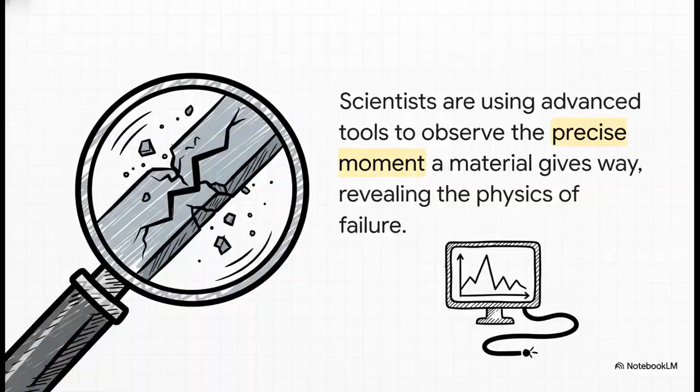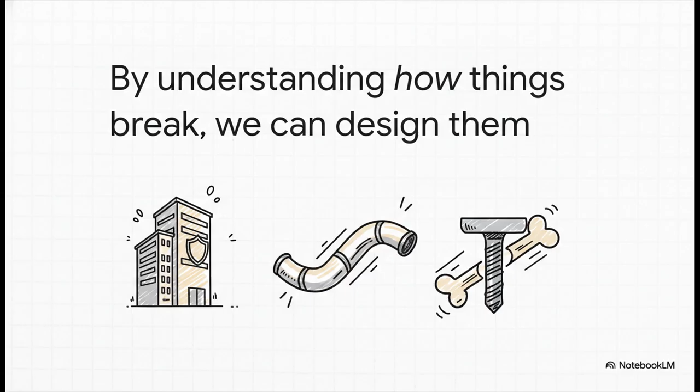So why does all this matter? Well, because if you can understand the exact physics of how something breaks, you can literally reverse engineer it so it doesn't. This isn't just some academic exercise. This research is the foundation for, well, everything. From safer buildings and more reliable pipelines to medical implants that are actually built to last.

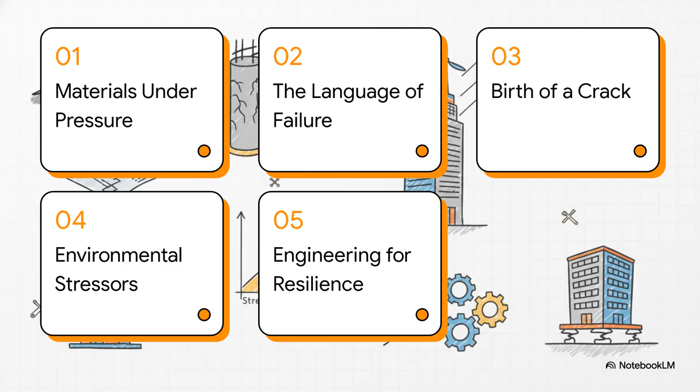All right, so in this explainer, we're going to break down the science of breaking. First, we'll look at the universal struggle of materials under pressure. Then, we'll learn the specific language scientists use to talk about failure. After that, we'll watch a tiny crack get born, see what environmental forces help it grow, and finally find out how we can actually engineer for resilience.

Okay, first up, materials under pressure. It's easy to just think of stuff like concrete and steel, but I want you to picture, say, a piece of wood, a metal gear, and even a human bone. They couldn't seem more different, right? But deep down, they're all fighting the exact same battle. And what's really mind-blowing is that the same fundamental physics applies to all of them.

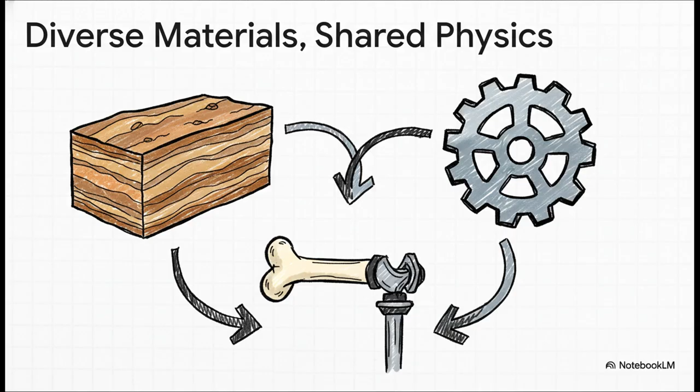The principles that decide when a chunk of sandstone gives way under miles of rock are the same ones that apply to an advanced metal alloy in a jet engine, or even that super delicate connection between a bone and a dental implant. It really is a universal struggle.

So we know everything is under stress, but how do things actually fail? Let's jump into section 2, the language of failure. Because it turns out breaking isn't just one thing. Materials fail in very different ways, and scientists have a whole vocabulary to describe what's happening.

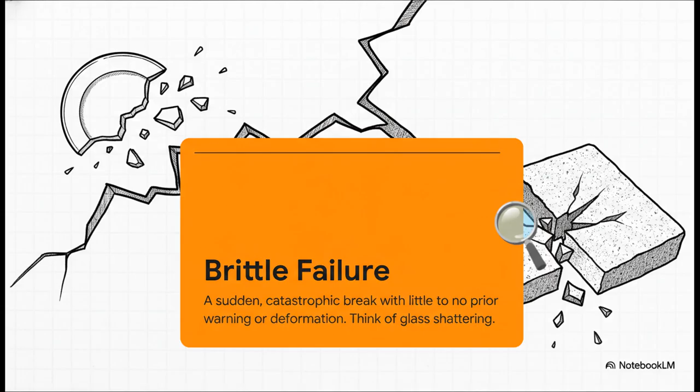First, you've got what's called brittle failure. And let me tell you, this is the one that keeps engineers up at night. It is sudden, it is catastrophic, and it happens with almost zero warning. One moment, you have a solid piece of granite or a glass window, and the next, it's just gone. In pieces. There's no time to react, and that's what makes it so dangerous.

On the complete flip side, you have ductile failure. Think about bending a paperclip back and forth. Long before it snaps, it stretches, it thins out, it gets all warped. The material is essentially screaming at you that it's in trouble. And this is a much safer way for something to fail, because it gives you a warning.

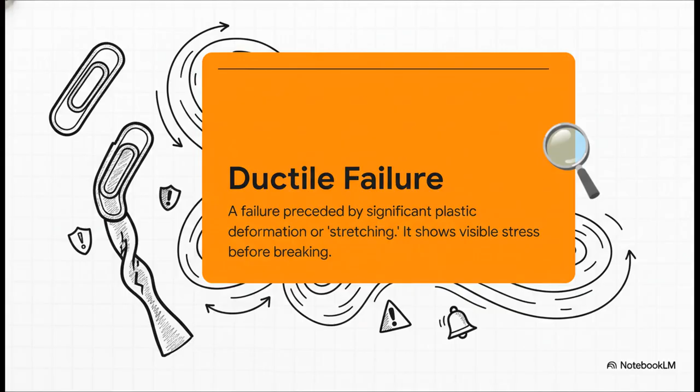And this just puts them right next to each other, so you can see the difference. Brittle failure is like glass shattering. It's sudden, it's clean, and it's over in a flash, absorbing very little energy. Ductile failure is more like pulling a piece of taffy apart.

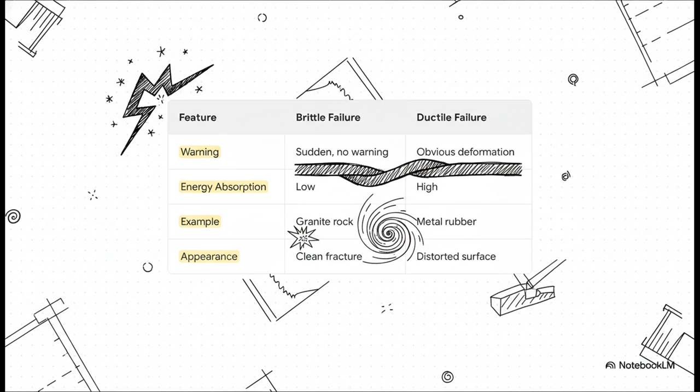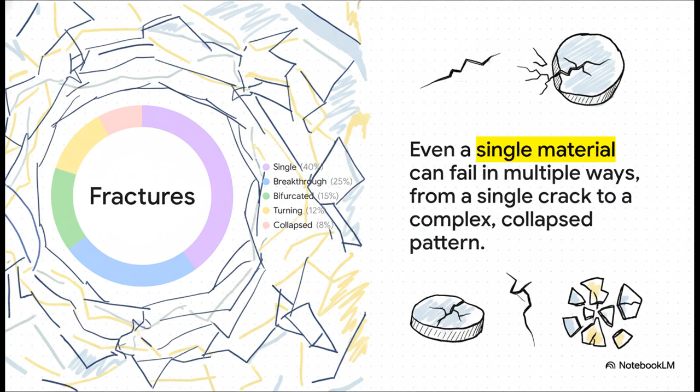It stretches and deforms, and it absorbs a ton of energy before it finally gives way. But of course, it gets even more complicated. Even inside a single type of material, this here is gangue cement, which is a mix of waste rock and cement they use in mines, failure isn't just one thing. It can snap in at least 5 different ways, from one single clean crack to a total collapse. And understanding these different modes is absolutely critical for predicting how something is going to behave.

Okay, so materials can fail in all these different ways. But how does a huge failure actually begin? Well, let's move on to section 3, because it almost always starts with something incredibly small, a tiny, almost insignificant flaw that grows into a crack.

So a fracture basically has a 4-step life. First, a little microcrack gets started, usually at some point of high stress. Then it starts to grow, to propagate through the material. The next step is where things get really dangerous. Nearby cracks start to link up, they coalesce, and form a much bigger fracture. And finally, you hit that point of no return, final failure.

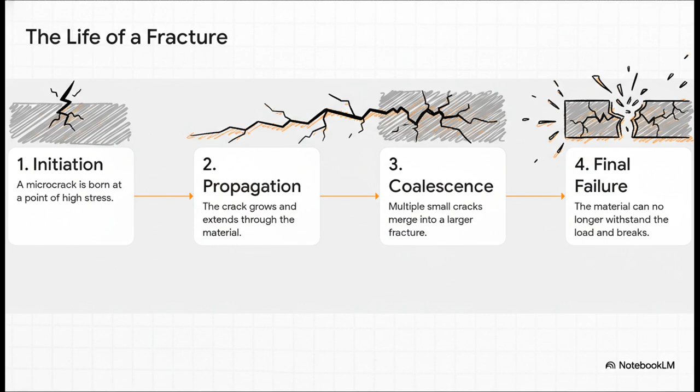And the science here is just amazing. Researchers have actually watched how as a main crack grows, it can spawn these tiny secondary cracks at its tips, sometimes called wing-shaped cracks. It's this incredibly intricate, almost fractal-like dance that leads to the final break. It's like watching a destructive little ballet happening at a microscopic level.

So, we know how cracks are born and how they grow, but what's pushing them along? What's feeding them? That brings us to section 4. See, a material rarely just sits in a perfect lab. In the real world, the environment itself is a massive, relentless source of stress. I mean, just look at how punishing the world can be.

Think about a simple concrete sidewalk. Over just one winter, the simple act of water freezing and thawing in its tiny pores slowly degrades it, creating microcracks that just get bigger and bigger. Or a sudden temperature change on granite. Even constant low-level vibrations from traffic can slowly, silently damage a bridge. And of course, a single earthquake can weaken a building in a matter of seconds.

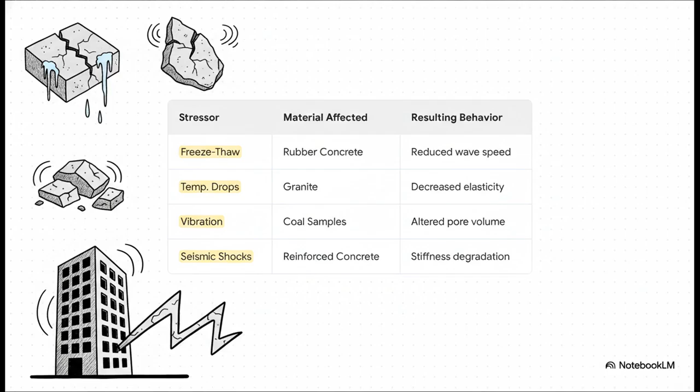So, with all these forces constantly at work, it might seem like failure is just inevitable. But what if we could fight back? What if failure wasn't a bug, but a feature we could actually design around? Well, that brings us to our last section, engineering for resilience. The goal isn't to avoid stress, it's to master it.

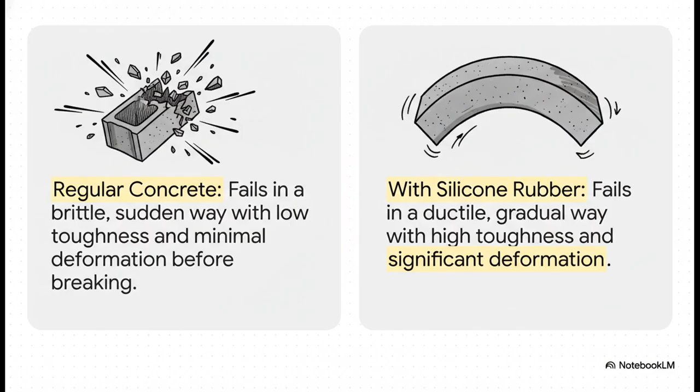And here's the crucial idea. We can completely transform how materials fail. Just look at this. Regular concrete, as we know, fails in a brittle, sudden way. But by adding something like liquid silicone rubber, engineers can completely rewrite its story. It becomes ductile, it deforms, it stretches, it gives you a clear warning before it breaks. It becomes tougher, safer, and way more predictable.

And you can see these applications everywhere, making our world so much safer. This science lets us design bone implants that perfectly distribute force so they don't overload the jaw. It lets us create pipelines that won't just catastrophically burst. And it helps us build railway tracks that can handle the constant, punishing vibration of trains, day in and day out.

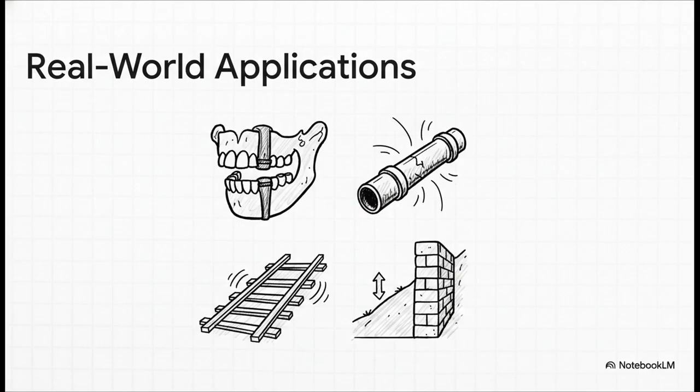Which, of course, leaves us with one last big thought to chew on. We've gotten incredibly good at predicting and controlling how and when things break. We can make them fail safely, we can make them last longer, but is the next great challenge even possible? Can we use all this knowledge to design something that truly defies failure, something that could last forever? What would a world without breaking even look like?